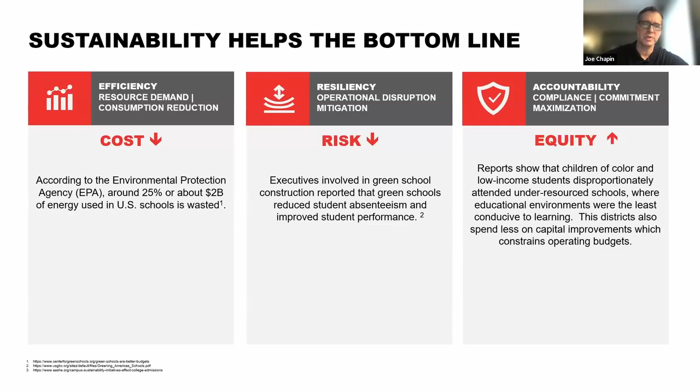Also, you're looking at equity. Reports are showing children of color and low-income students disproportionately attend under-resourced schools, or educational environments that were the least conducive to learning. Put a building automation system in place, and you're able to raise the level and the quality of those schools in general across the board. So you want to also think of equity in this particular case. Air quality does matter, and it's no more prevalent than now after the pandemic that we had.

I don't think I'm understating things when I say the pandemic changed everything and brought IAQ, indoor air quality, to the forefront. You want adequate fresh air exchange, maintain proper climate, and that includes humidity, testing for TVOCs, organic compounds, and CO2 levels. For those in a very dry or very wet climate, you're going to look at humidity levels as well, since monitoring and controlling humidity is very important for comfort. You want to be able to access your HVAC data without disruptive or expensive upgrades.

One of the key things I mentioned a couple slides ago was the T1L, which is 10 megabit over existing 2-wire. The optimizer controller we have is the only controller on the market right now with the ability to use T1L. What does that mean? If I can reuse existing wiring, I don't have to place new cables. So those schools that were out of reach for upgrades now have this controller option, removing the cost of placing newer cables. You could bump your school into a new era where you're able to make those changes for a lot less money to install said service.

You can also look at taking your facility to the cloud with a remote building manager. That means you can connect your facilities, whether one or multiple, via the internet to the cloud. You get a holistic view where you can monitor, watch, reduce, and automate all of your facilities from a single pane of glass. This can be as simple as using a smartphone or a tablet to do so.

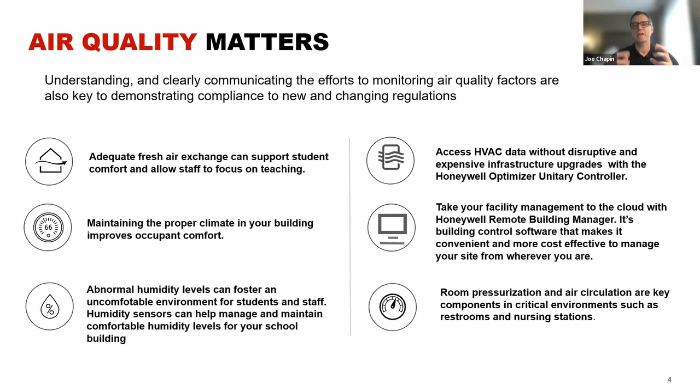Last thing I'll talk about is room pressurization. With the pandemic, the pressurization of a room is important, whether negative or positive. Take a sick room in a school, for example. You want negative pressurization. I walk into that room, all the air goes up into the return, does not escape out of the room itself, so it contains the air in that room if anybody is sick.

So I get this question a lot: Well Joe, why do I want to do a smart building? What's the point? I boiled it down to 9 reasons. These are by no means all-inclusive, but for one, you're building for the future. You're putting the next generation of controllers into your facility. You're turning your facility into essentially a large computer. It is centralized control of a distributed system.

The third tile on the right, you want to look at what's called an open system. Honeywell has a software service called Niagara. Niagara is an open system, meaning when I put a Niagara system in place in my facility, it's software. Think of it as the Microsoft Windows for building software. I now have the ability to have an open system, meaning I'm not locked into a single vendor. I can choose from multiple contractors who are Niagara certified to work on my system, meaning I get competitive bids. If I don't like the service I'm getting from contractor A, I can look at contractor B.

So Niagara, open system. Of course, when I say open system, I also talk about system integration. The number one question or concern I get from customers is system integration. What they tell me is, I've got HVAC on one system, fire on a second system, elevators on a third, video on a fourth, security, and all of the systems are separate, none of them talk to each other. How do I integrate the systems under one centralized control? Niagara is how you do it. It is the umbrella system bringing all systems together.

So when you do that, you look at the tile in the center, you get to facility optimization. You can do things like static pressure reset, optimum start, in addition to many other things, so when the system is connected under one system, you have all of them working in conjunction together to optimize the facility as best as possible. Also, when connecting to a high-speed network with our controllers, in some cases our controllers can do 1 gigabit, that's 1,000 megabits, you get real-time information. You get HD video on top of security, on top of HVAC, all in the same system, with no or little slowdown because of the bandwidth you're taking advantage of.

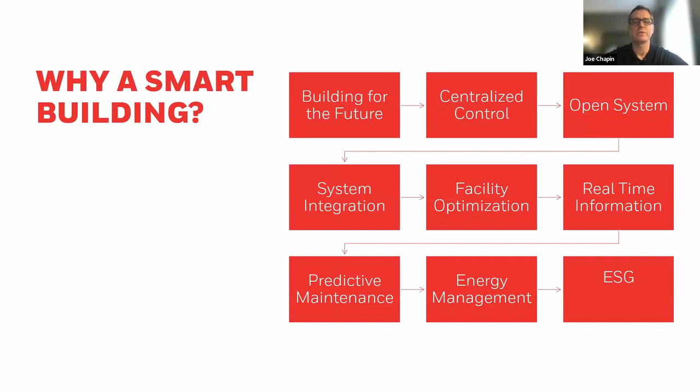These are the devices that connect to that high-speed network. You have your controllers, your security cameras, your actuators, all the different components that are connected to a single network under one. And the third thing, of course, is your software and your cybersecurity.

Besides the question of integration, the second question I get is if I'm connecting my facility to the internet, I'm afraid of hackers, I'm afraid of what they're going to do. So what we tell them is when we have the Niagara system installed and in place, we have the cybersecurity built into the Niagara platform. It is in the form of a FIPS 140.2 level compliance, which stands for the Federal Information Processing Standard, some of the highest cybersecurity available. So again, that is built in and taken care of with the Niagara system.

Now, IP networks, Internet Protocol networks, that is the standard language of the internet. And here's why IP controllers are so much more desirable than your standard controllers. If you look at your standard operational technology, BACnet, Modbus, FOX/FOXS, they typically run around 78 to 80 kilobit. That's about the internet speed of 1995. So if you're on one of those connections, it's like you're surfing the net from a 1995 internet connection.

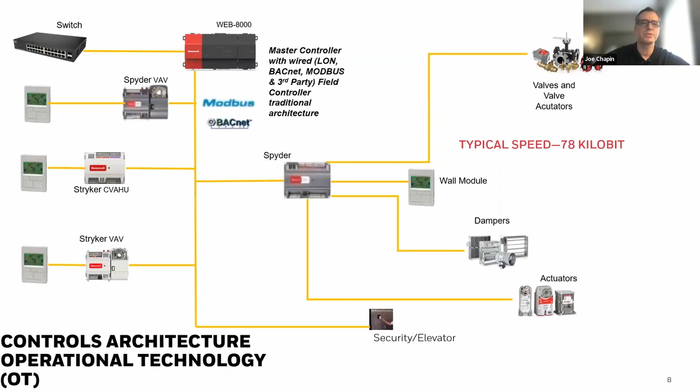To a network that you most likely have in place already. I have yet to see an educational facility that does not have some type of Cat5 network in place.

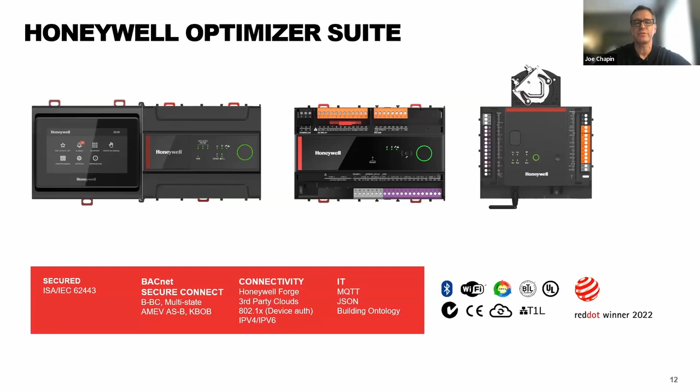These are the three lead controllers we have right now that do all the capabilities that you need to upgrade a system at a minimal cost. You're also getting advanced cybersecurity and full stack Niagara built in. Full stack meaning a fully functional version of Niagara system.

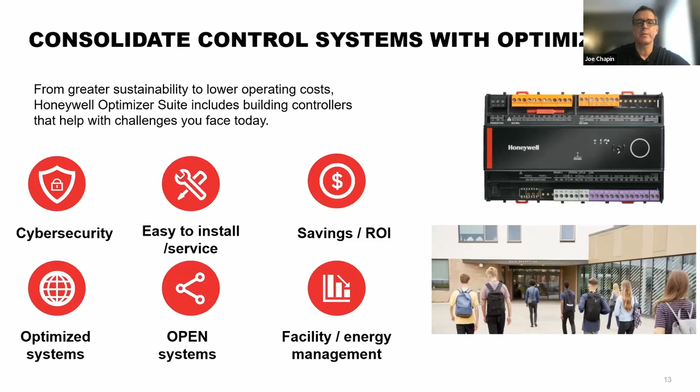So here's kind of the bells and whistles of the optimizer system. It's great for sustainability and lowering operating costs. You have, again, cybersecurity built in, easy to install. You can achieve energy savings, and you can recoup the investment, whether you're saving on cabling or you're doing energy management. You can optimize your systems, again, open system, and then you have a facility energy management protocols built in that we can work on as well, where you can track and monitor energy, water usage, gas usage, and so forth. So again, a very great functional device that can straddle all the different types of networks that are available. Incredible option for upgrading your facility.

So let me talk briefly about T1L. T1L is not a Honeywell standard and or product. It is an IEEE standard that's been around since 2019. And what T1L is, again, 10 megabits over 2 wires, we can go up to 300 meters between controllers with T1L. That means if I have an approved 2 wire circuit from A to B, I can go up to 300 meters without a controller. So again, 10 megabit single twisted pair.

So again, remember T1L, remember reuse existing wiring, remember not placing new cabling, and remember we've got the controller that can do that, several controllers for that matter.

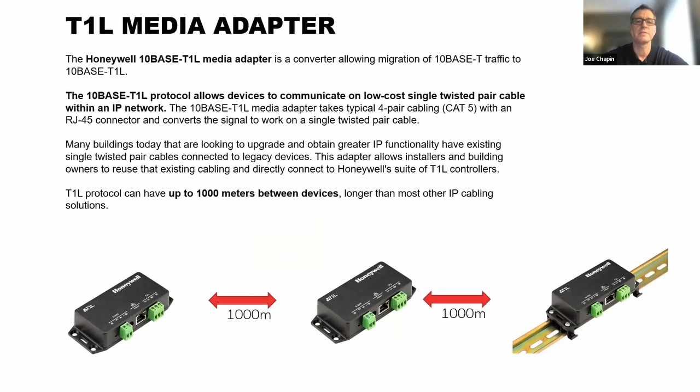This is the T1L media adapter. This will allow you to extend it 1,000 meters between devices. So if it's a facility with an outbuilding that they want to get connectivity to, and they have a long 2-wire circuit, this is how you do it. So if you can't go 300 meters between the controllers, you can go up to 1,000 meters with this device, using either Cat5 or T1L twisted pair.

So this is a little closer look at our Spyder 7 VAV. This has a built-in actuator. It has Bluetooth, I/O modules on the left and right-hand side, and T1L capability. Fully programmable, 7 universal inputs, 5 solid-state relays. It also supports Sylk and Modbus. It'll install on both square and round ducts - a very good form factor on this device.

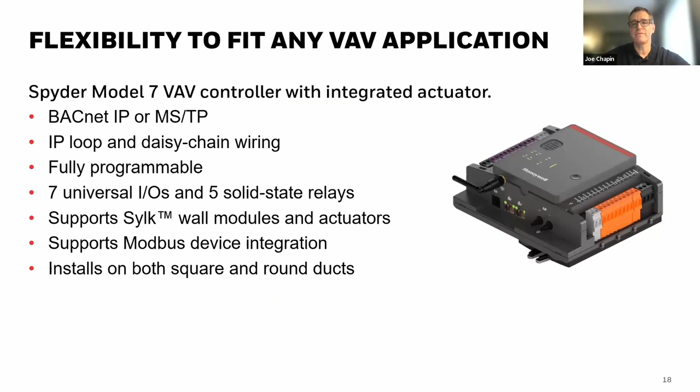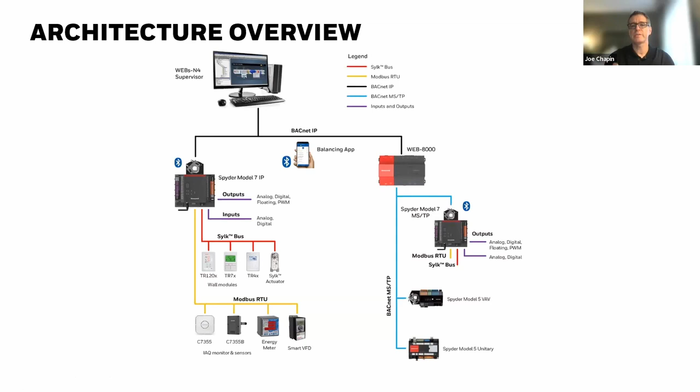You can see here on the left-hand side what they've done is put a Spyder 7 VAV, and they've picked up analog devices, Sylk Bus, Modbus, and you also have Bluetooth as well. Over here on the right, you see it downstream of a Jace again. So the point is, very small device, built-in actuator, T1L capability, and it has the ability to bring multiple devices together.

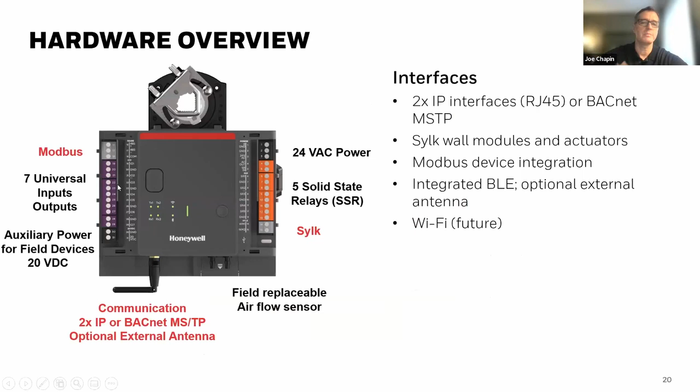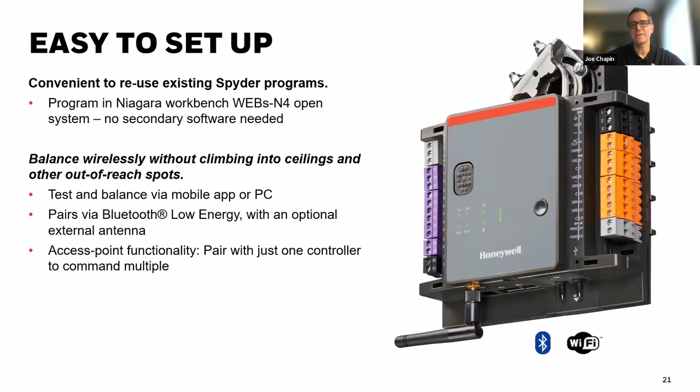The other really good benefit about this - this shows you in more detail what this has: Modbus here, inputs, your Sylk. You also can balance it wirelessly. So what that means is I can put the device, plug it into my Niagara workbench, write my control sequence on the original device, install the device. I can test and balance it via the mobile app or the PC if I want to - that could be wireless if you want to.

Then I can take the control sequence and clone and send it out to all the subsequent devices. Think of the amount of time you're going to save, having to go from the old way of plugging into each device with a laptop, to now being able to do one device and send it out to multiple devices and clone it. This also works for upgrades as well. So a very great functional device, and the built-in actuator is kind of the cherry on top.

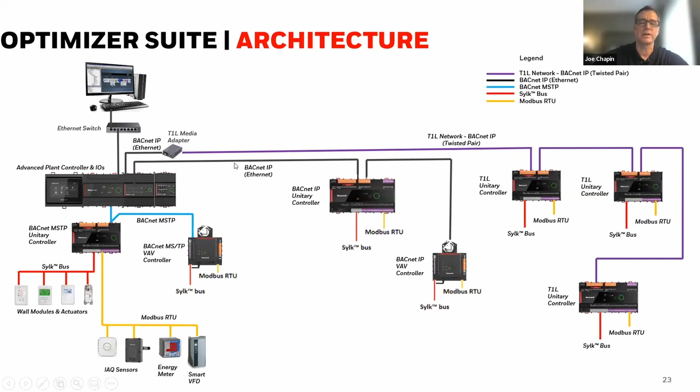You also have the ability where it says BACnet IP in the center - that's category 5 cabling, not necessarily T1L twisted wire cabling. So you have all these different communication options. What this does is simplify your network architecture. The backbones are T1L or BACnet IP. All the devices downstream of the controllers, depending on the communication method, you have all the flexibility you want to bring it into one device and backhaul it up to the BACnet IP device via T1L or your category 5 cabling. So a lot of things you can do here.

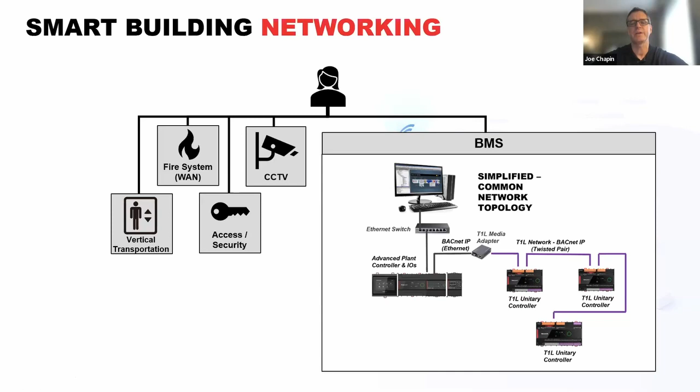So in this case, what this is showing you - I have multiple different networks to start with. I implement the optimizer and I simplify the network. What it's also showing you is on the right-hand side, I've got my BMS system, just building management. But then if you look at the symbol of the woman there, that indicates the Niagara system. And what they've done is brought in fire, CCTV, security, and vertical transportation, which is elevators. So all this is brought in, watched, and monitored under a single system when you use the Niagara system in place.

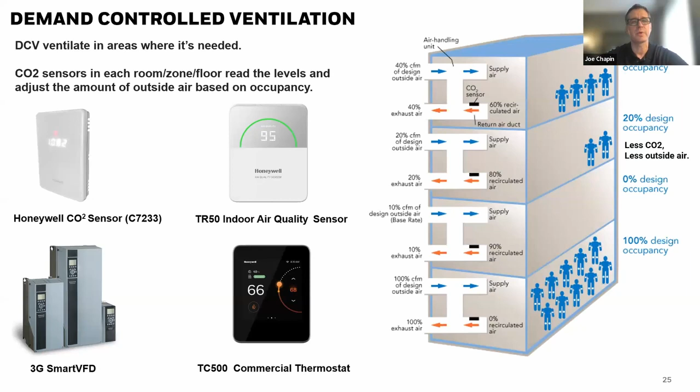And then, of course, the other thing we talk about is our variable frequency drives. These are devices that attach to motors, whether they're fans or pumps. Instead of having 100% on or off, it can go anywhere from 0 to 100%, and you can vary the speed of a fan or pump, and it saves a ton of energy with your VFD drives, variable frequency drives. That's another part of the strategy for energy savings.

Again, modulate the fan speed of these devices itself, and then you couple it with a building automation system, and you can match changing conditions. In a lot of cases, you don't need 100% fan capacity. Sometimes 25 to 30% will do. So imagine over time, if I'm running my fans at only 25% capacity, the energy savings that can really stack up when it comes to using that. VFDs are a key part of the strategy, and these are also connected to the BMS system.

School building management. The other thing we have here is this software package where you connect one or multiple facilities and you can get remote control and monitoring, again, from a tablet, from a smartphone. You can have real-time details about the comfort, the energy, alarms if something breaks or the temperature or humidity goes way out of your threshold. It'll send you an alarm and ask what you need to do.

In a lot of cases, you can fix that problem without necessarily being on site. You can do scheduling, you can do alarms. If you're going to have a week off of school where you want to shut down everything, whether it's the heating or cooling, you can do that all from the phone. You don't have to be on the system itself. So again, a completely connected system, all the different components connected, all in front of you on a tablet or phone, and all automated, giving you real-time readouts.

And you can take it the next step too, where you have different services that will look and monitor and watch your facility to look for key ways to save energy in your system, make suggestions. This also does take into account climate. Say, for example, somebody in Phoenix is not going to have the same needs as somebody in, say, Louisiana or somebody in Minnesota, depending on the time of year.

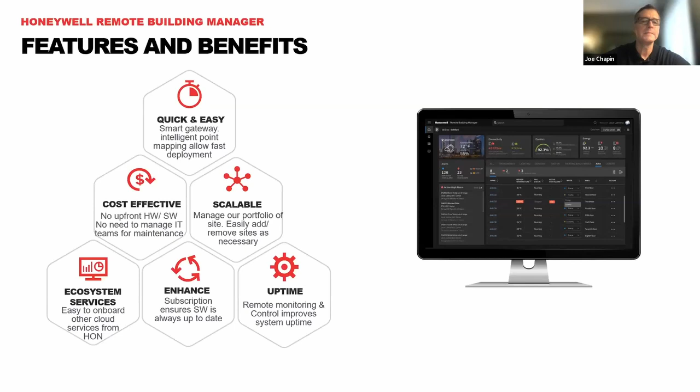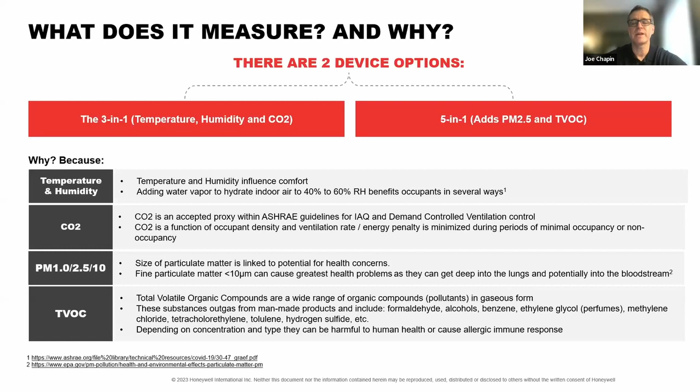So again, a lot of things you can do with this when it's connected. By itself, it's a great unit, but also connecting it, you can build in the automation as well. A lot of things you can do.

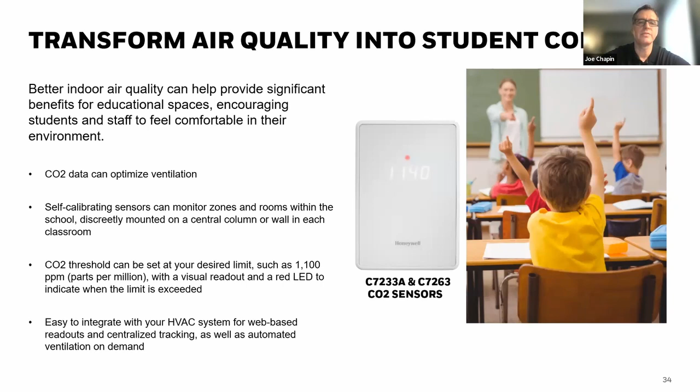This is our TC500 thermostat. Very simple device, touch screen, slide up and down. This particular device on the front is showing you the humidity level is 48%. It is occupied, it is 66 degrees, and they're setting it to 68. The yellow flame indicates it's going into heating mode.

I'm going to touch on a couple of the points here. Three-stage heating and cooling, good for air handlers, rooftop units, and heat pump systems, which are coming back into fashion, so to speak, with energy savings.

You have a setup wizard that will cut the installation time. You also have a contractor wizard. These have been very popular for some military housing for a couple of reasons. Number one, it's very easy to integrate and install, connect via Bluetooth, Wi-Fi, BACnet, or Sylk.

You have a homeowner or unit owner app where you can do the scheduling on your phone for this device. In addition, the contractors have an app where they can set it up via Bluetooth to program the device itself.

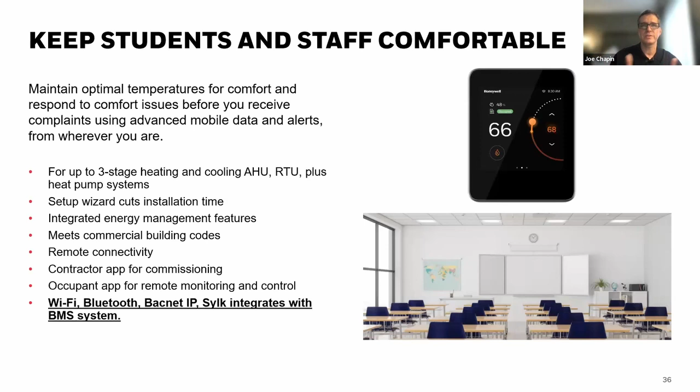This device by itself can connect to a CO2 sensor in a unit, providing a very small building management system for a single unit. Or you can connect multiple TC500s to a centralized device for centralized control. So it's very flexible that way.

On the left-hand side, this just shows you how it looks. Current temperature, system mode is heat. If it's cooling, it's going to be the snowflake here.

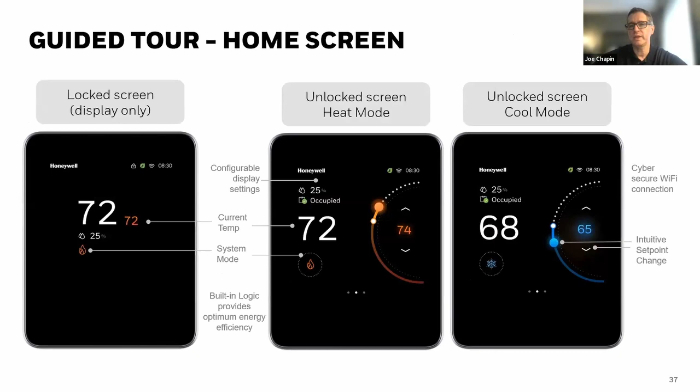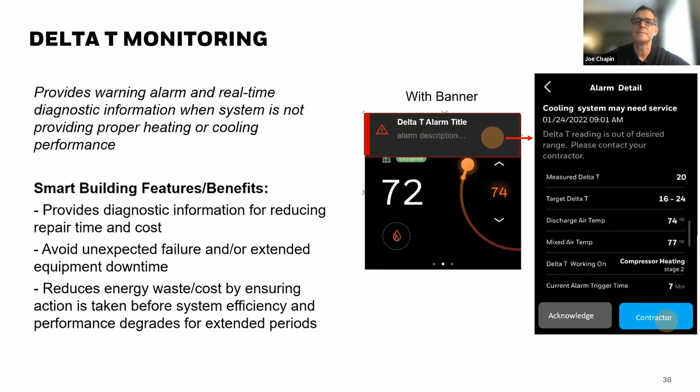Pressure sensors are another part of the strategy. Negative pressurization in a sick room - I walk into the room itself, all the air goes out through the exhaust, no air leaks into the hallway. That would be a negative pressurization situation.

Second thing is positive pressurization. That would be for telco rooms in a lot of cases. So I would install negative pressurization systems in sick rooms, maybe wood and metal shops, auto shops where there would be fumes, maybe some art rooms where they may be using paint, things of that nature.

So again, negative pressurization, you see more of that than positive in a lot of cases. You'll see positive pressurization in data centers, but the point is, if I put these air pressure sensors in place, I can control the pressure and control the airflow of a room that best suits my needs. Air pressure sensors are another connected option you can do with your facility itself.

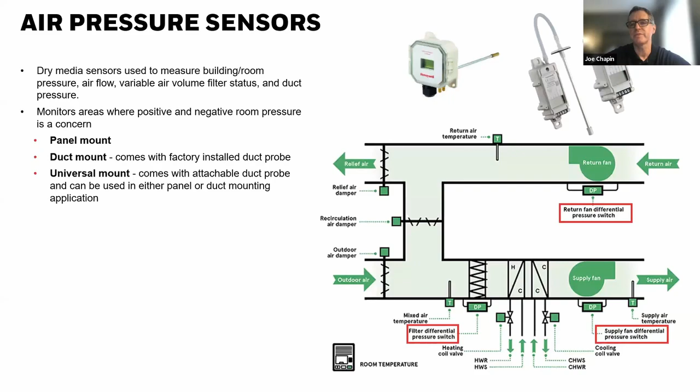So a lot of people ask me, why do I want to specify Niagara? What's the point? Well, number one is compatibility. Niagara is an open system. Multiple contractors, I can have competitive products or existing products that work and talk via a standard open protocol, BACnet, Modbus. I go in, I put a Niagara system over the top of that.

They will go into the Niagara system and go into discovery mode and put the points together and build out the system itself.

Risk mitigation, of course, is very important. We have the highest levels of security available, built in, provided by the Niagara system. Cost savings in the form of getting competitive bids from different providers. You're no longer locked into a single contractor for system X. We support multiple systems. And then, of course, it's flexibility - like I said before, multiple systems are supported.

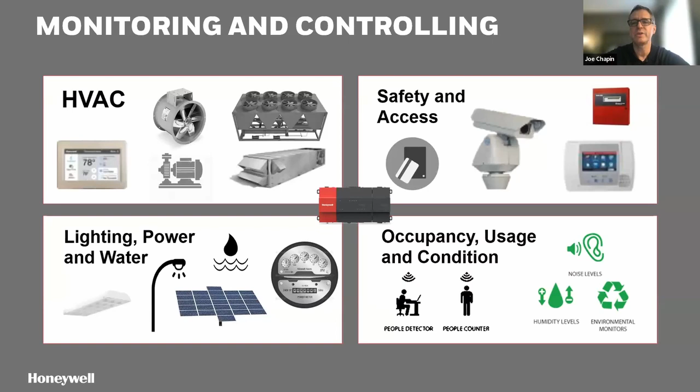Then, of course, you can go as far as you want with people counting, people detecting. The thing about Niagara is we are always adding new drivers, new abilities every year to bring it into a centralized system. If you want to get a little more granular, these are all the different areas to which Niagara can integrate into one system.

As you can see here, you've got lighting, HVAC, metering, power metering, gas, water, electric, safety, sensors, you name it. So there is no more open or inclusive system when it comes to building management than Niagara on the market that we are aware of.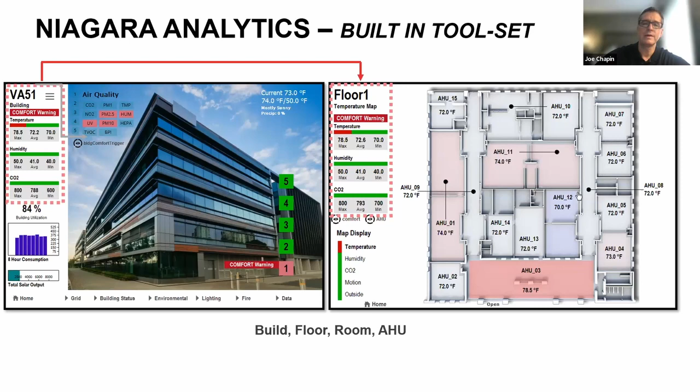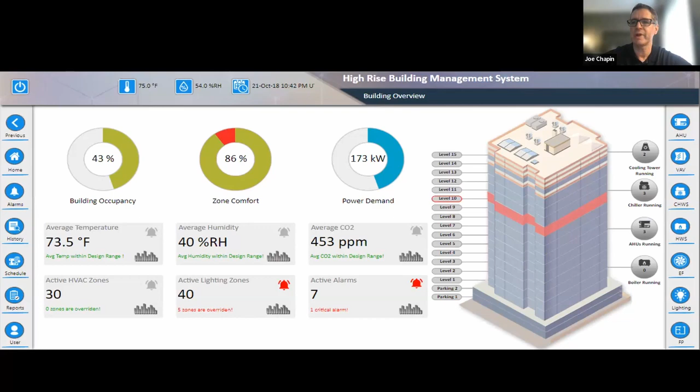If you want to look at a specific building, here's an example. On the left-hand side you have home, alarms, history, and schedules. Looking toward the center, my entire building averages 43% occupied. To the right, 86% are in the zone of comfort, and we've used 173 kilowatts so far. Below that you see average temp and average humidity for the entire building, and then all your zones—lighting zones, active zones, and so forth. On the right, I have the ability to click and look at my cooling tower, my chillers, my air handlers, and my hot and chilled water systems.

If I want to go down to a specific floor in more detail, this is floor number 10. On the left-hand side, all the average temperatures by zone, color-coded. On the right, like before, air handlers, VAVs, average temperature. You can click on all these and get a mock-up of a specific VAV if you want, like this 3D readout. I believe this is an air handler here. You can bring this up and look at it.

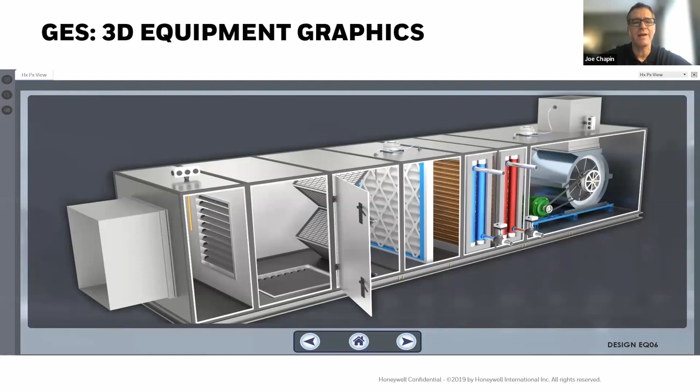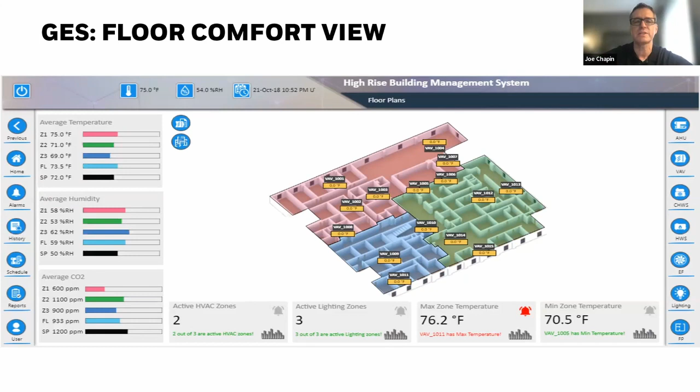I don't see this type of implementation done very often when it comes to graphics, but I wanted to show you what the possibilities are. More often than not, it gets to this point—you click on the VAV and it'll pull up a readout of all the specifics on that particular VAV or air handler.

So let's look at what you would do with a school. One of the questions I get asked a lot is, what's the best way to start with this? This, in a general sense, shows what a typical school would look like. On the left, you have the school administration building looking at ASHRAE parameters, a healthy building dashboard, and the remote building manager. You want to do a facility audit to start—what do you have, what kind of system, is it an old pneumatic system or more modern, and what kind of connectivity do you have? This is showing you the different areas.

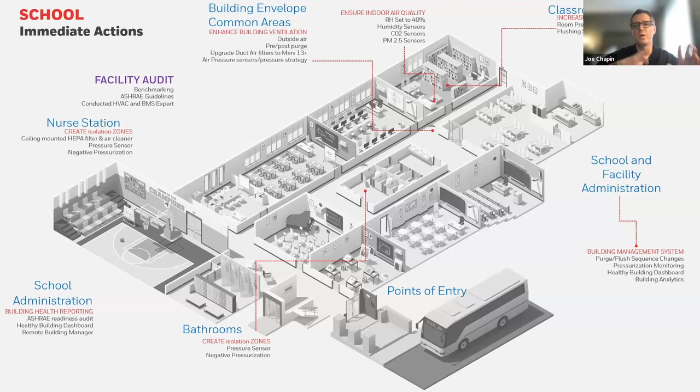At the top, I've got MERV 13 filters, PM 2.5, CO2 sensors in key specific areas, and I'm looking at pressurization. So you want to look at all the different parts of your system—where can you connect, where would it make the most sense to have CO2 sensors, and do you have a government requirement for one? I believe in California there's a requirement for every classroom to have a CO2 sensor in place. This just shows you in a general sense what it would look like in practice when doing a school or building.

So predictive maintenance—we'll touch on that briefly. It determines the condition of in-service equipment in order to estimate when maintenance should be performed. It looks at routine-based maintenance you've done in the past and feeds that into a predictive model. It looks at actuators and air filters, sensing pressure drop—meaning this filter is clogged and needs replacement—to help with your HVAC maintenance.

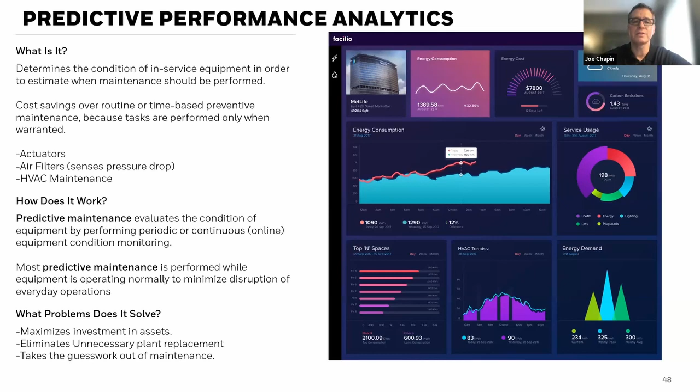Most predictive maintenance is performed while equipment is operating normally, to minimize disruption. It maximizes your investments, eliminates unnecessary plant replacement, and takes the guesswork out of maintenance. When you go from reactive to predictive, more often than not it translates to savings—whether that's time savings or money. So this monitors and watches your system as part of a predictive maintenance model.

One of the things you can implement with a smart building is what's called optimum start.

What that means is I want the temperature to be 72 degrees by the time I walk in the morning at 8 o'clock. Before, with a not so smart system, you would get there in the morning, or the maintenance person would get there 2 hours before and turn the thermostat up.

This implements control sequence number two. It does two things. On the top right, you have a normal thermostat in red showing the ups and downs of manually turning it up and down during the day. With the HVAC controller, you can even out those highs and lows, which translates to savings.

So on the bottom right, if I want to be at a certain temperature by 9 o'clock, I can start the system at 6 o'clock. When you have this in place, it takes into account the outdoor air temperature as well, so it could be heating, cooling, increased or lowered humidity.

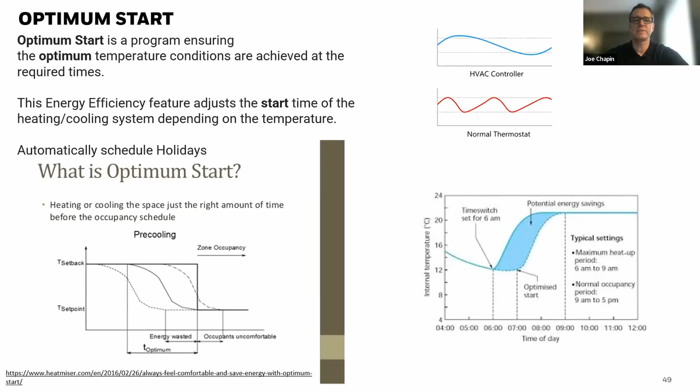You can do humidity, CO2 levels—all of these things can be implemented. It's not just temperature, it can be other things as well. This is a great way to make the system as optimal as possible. This is optimum start.

The other thing you can do—there's a lot of words on this slide, let me put it this way—is static pressure reset. Static pressure reset determines the amount of air pressure needed to get to the end of the system, the furthest point, to make the system work properly.

A lot of times, the static pressure in a building is set higher than it needs to be. If you put pressure sensors in place, this recalculates the amount of static pressure needed to get your system optimally set. Instead of guesswork, I can say I want my static pressure to be X, and it resets and adjusts the VAV boxes to make sure the pressure is working the most optimal way—again, translating to energy savings.

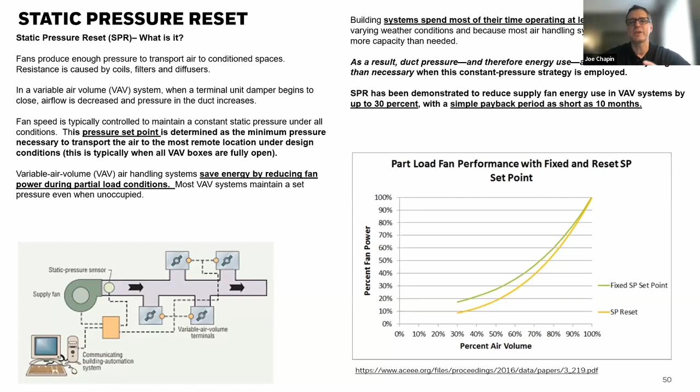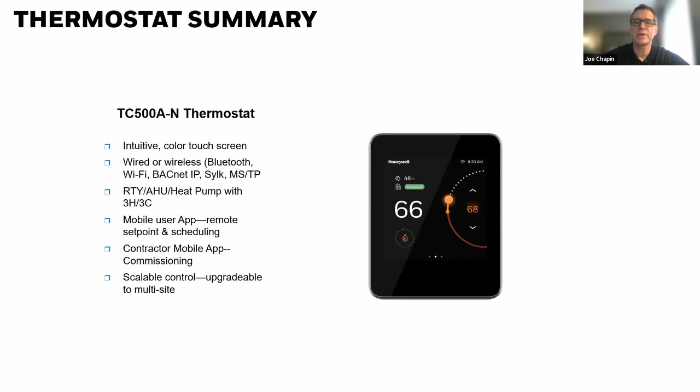And there we go. Do we have any questions at this point?

Joe, thanks a lot, that was a lot of information. Yes, when I saw the slides going in, I was like, I don't know if we're going to get this in the hour, but you did it and explained it really, really well. At this point, I encourage the audience to ask any questions or thoughts for Joe.